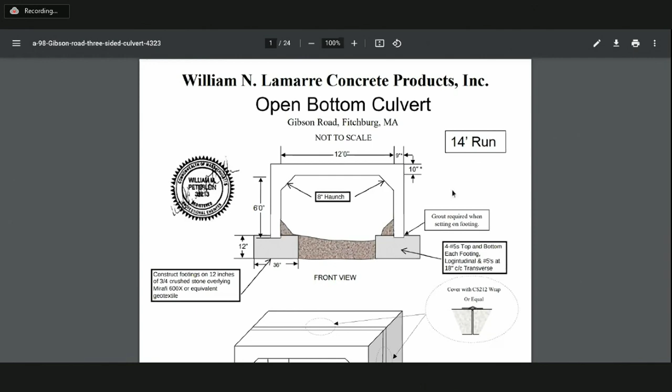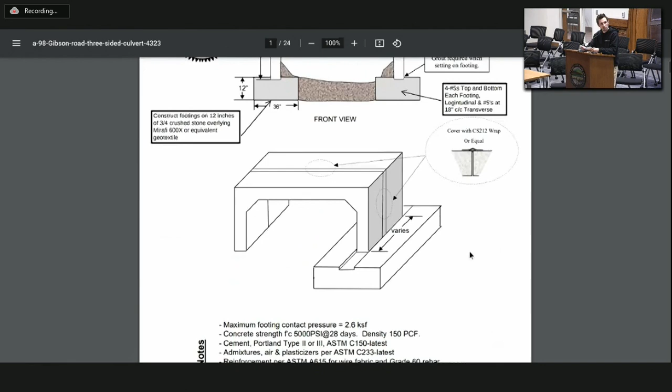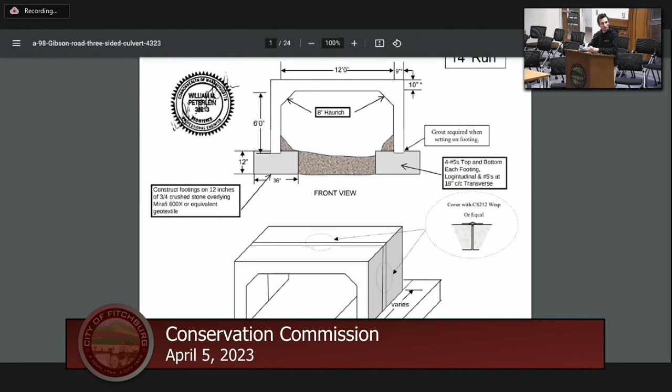Yeah, so this drawing is a little different because it was the best option that we had, and the clearance is going to be well past the stream, so it should not be an issue. Do we know what the distance is from footing to footing? Well, you got 12 feet here, so minus 1.5 feet on each side, so you got 9 feet.

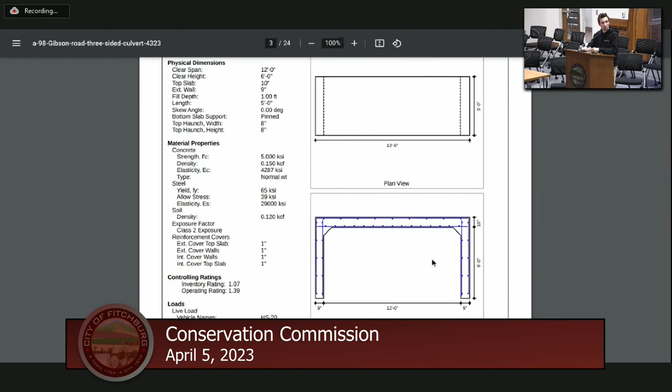Okay. The chair had asked at the beginning of the meeting about the stormwater standards. So with regard to the stormwater standards, Fitchburg is somewhat unique. The State Wetlands Protection Act gives basically a waiver to meeting the stormwater standards for a single-family home. However, the local Fitchburg Wetland Protection Ordinance does not give the waiver. So even if it's a single-family home, it does need to comply with the stormwater standards.

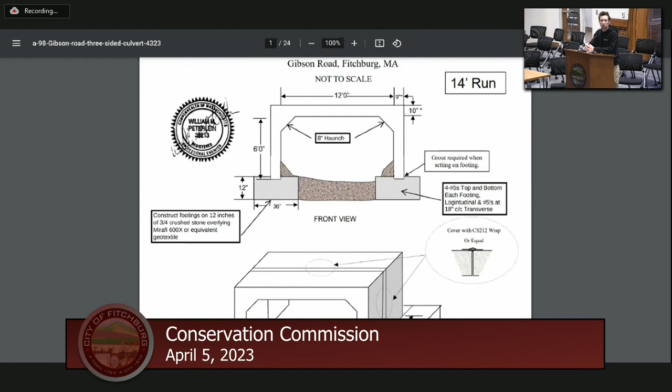Was there a submittal to show compliance with the stormwater standards? So last month we spoke about this, and my engineer had explained that this is the procedure in this situation, and it's been done multiple times. And, you know, based on the stream, I mean, it's 4 inches of water. It's not, in no way is it going to ever be 5 feet to the bottom of the bridge.

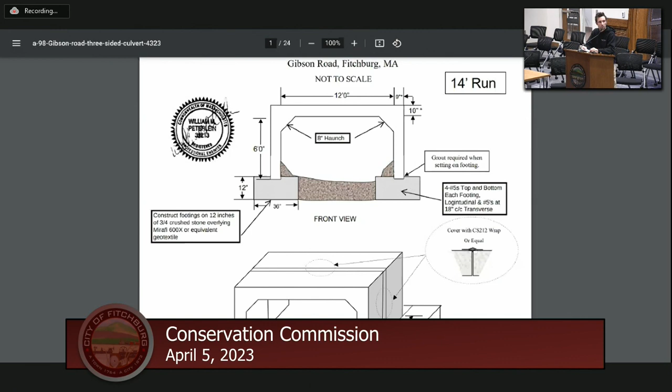Yeah, there's a little confusion. I think when we speak about the stormwater standards, we're talking about, for example, the amount of impervious area that's added to the site. And one of the standards is that the post-development rate of stormwater runoff must be equal to or less than the pre-development rate of stormwater runoff. So those are the standards that I'm referring to.

Well, in speaking with my engineer before this meeting, in his 45-minute monologue last month, I believe we covered all of this. As we both believed, this particular meeting, when we left off last month, the situation was to present the specs, which we have here. So I believe everything is covered in last month's meeting, which should be covered in the minutes. So I don't have anything to add to that because it's already been covered.

Well, it sounds like the answer is no. You haven't submitted documentation showing that the project is in compliance with the stormwater standards. That's what I'm hearing. Because it's been satisfied from last month, as we believe.

Mr. Smith, if I can interrupt here, in the letter from Mr. Popham, we have number 3, a stormwater report is not required by the state regulations, but you are required under the local regulations, the Fitchburg stormwater regulations. I mean, that is something that's fully documented. So if you want, Mr. Kurgowski, if you'd like to hold off on this until Mr. Popham is available, we're welcome to do that.

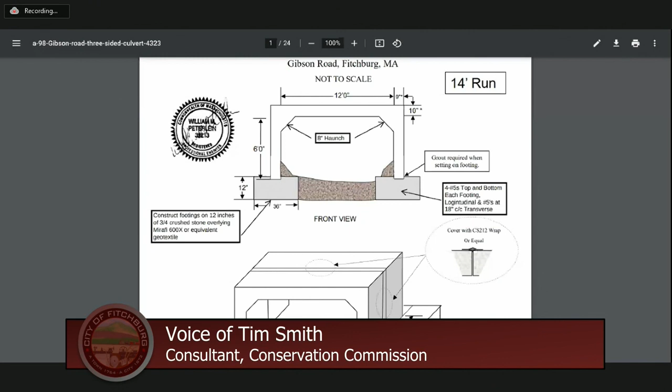Yeah, so part of the issue is this: the plans on the screen right now are the first time I've even seen these plans. I'm pleased to see that it has a PE stamp. I know that was a big issue raised at the last meeting. I'm pleased to see it.

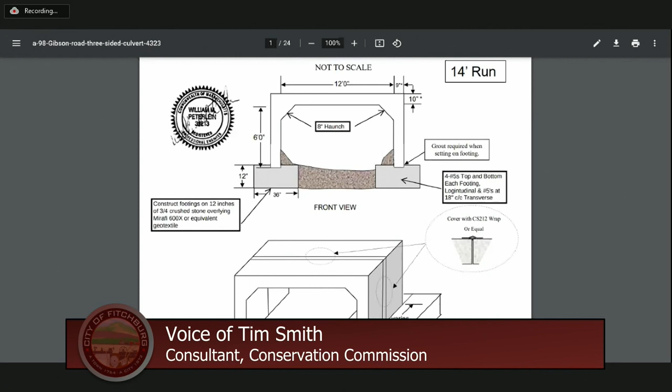It used to be that the height of the bridge was 5 feet 5 inches. The standard for large wildlife is 6 feet, so now it's compliant with the standard in the stream crossing standards for large wildlife crossing. And the footings, before they were stone, and now it looks like they're still stone, but the footings are definitely larger than they were.

So it looks like a number of improvements, and I would recommend that Nick Erickson review these drawings, so there might be further comments from Nick after he takes a look. But the only remaining issue I had was the stormwater standards.

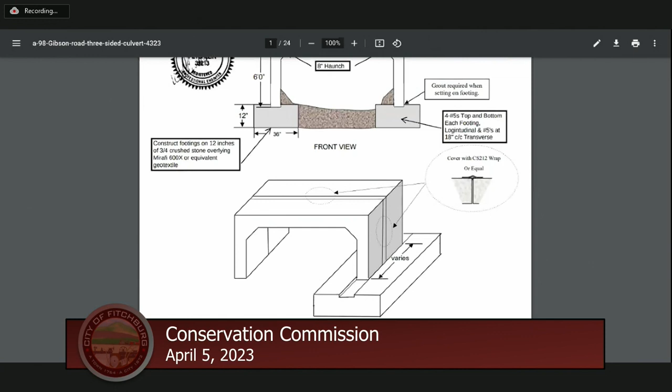Certainly. So you can refer to the local stormwater standards and the local wetlands bylaw to make sure you're compliant with those, because it looks like you were compliant with the state, but we also have our own bylaws here in Fitchburg. Okay.

So, Commissioner Donnelly, did you have a question? I did. Happy to see the culvert foundation. So there was a change in it. It shows a poured concrete footing.

Correct. And a little question I have is in one narrative, it said it would be at grade, and then the picture in front of us shows 12 inches below grade. And a little thing like that needs to be addressed, just explain, that's all.

Yeah, so this is how this particular company designs this. When Mr. Popham designed it, it was based on a different company, and this company is a lot more available, easier to get products. So I asked them if they could design it similarly, and they designed that with those footings. So that's the situation we're in. I think it's a better situation all around anyway, and I feel a lot more comfortable.

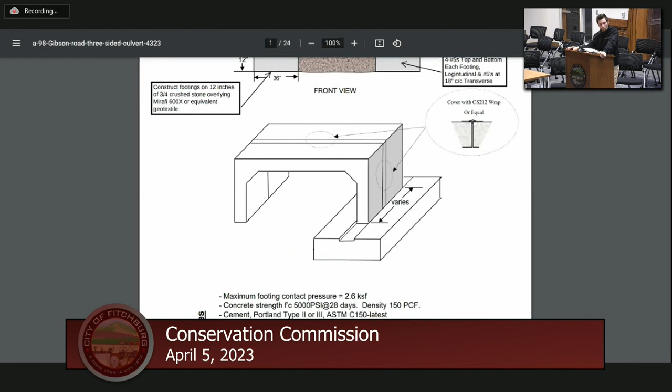I mean, either way, they're both rated the same as far as H20 for triaxle trucks, et cetera, but this is something that makes me as a builder feel more comfortable as far as traffic going over it. So I was happy to see that as well. It shows a depth of 12 inches.

Correct. So what? Well, I bet the Conservation Commission doesn't want to see you back in 5, 10, or 15 years to replace the bridge because of either heaving or settling. So the soil beneath it, I was of the impression that the soil might be saturated, and maybe it is, but it's gravel. I saw all of the test holes, all of the spoilings.

Far be it for me to tell you what element of compaction is necessary to support that bridge at 12 inches below grade from frost or settling. But that was a concern, because either one of those may have you back here, and what it does is just a further intrusion on the brook. That's all, and I want it to be.

Right. Thanks. Yeah, I would just remind the commission that we recently dealt with the bridge at Arbor Way, that because of disrepair, or because the bridge wasn't either constructed properly or designed properly, one of the two, the bridge is now in disrepair, and a significant amount of wetland is going to need to be filled because of that. So it makes sense to really review the design carefully, so we don't have a repeat of that problem we had on Arbor Way.

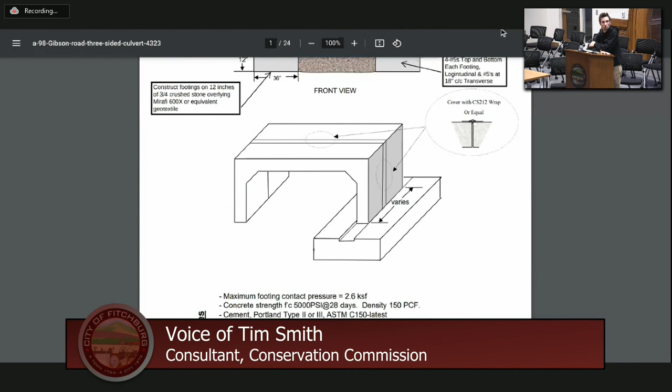Okay, so just as a response, this bridge is constructed for this specific reason, to go exactly as we're putting it. So we're going to be putting this bridge in exactly to specs as it was designed for. So I don't believe there'll be frost heaving, because it's exactly designed how we're installing it. Is that, you follow? I do.

It's about frost line. Okay. Above or below frost line, it's about saturated soils or hard and dry soils. I don't have the answer. I'm skeptical. Okay. And I'm sharing it with you.

You just heard, you should have heard that loud and clear, where we're going to lose a chunk of wetlands on a bridge only 20 years old, and it's huge. This is a drop in the bucket, but we don't want to go there. Right, no. And you don't want to go there. Exactly. Yeah.

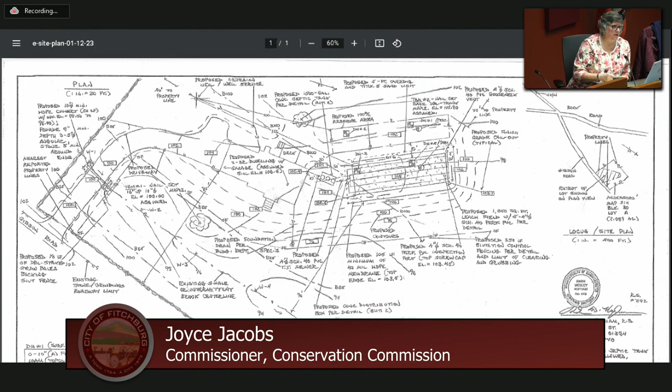Mr. Kukowski, is your intention now to add this new bridge design to a new set of plans for the entire lot, so we can see all the elevations as they're in place? That's not my intention at this time, because they're very minor changes. I don't think that would be necessary.

Aren't you going to have to do something? I would expect the building department is probably going to require you to have the plans. We want to be able to reference this as what we're conditioning on, a set of plans, and this is what it entails.

The set of plans submitted, that are on the screen right now, do not include the bridge. This is with the culvert. There are some additions. We've now determined that it's an intermittent stream rather than a swale. So the suggestion would be to have the plans updated, because you're going to need that anyway.

They've been updated. They should be in the system. We did it two months ago. This is the latest plan that we have. Well, I have a plan here with a bridge on it that I submitted two months ago.

So there are two sets of plans, one with the culvert, and there should be another one that we had on the screen two months ago with the bridge, not the one being proposed right now. That was the bridge that Mr. Popham presented at last month's meeting, in a different fashion.

So then my other question, leading up to that, is your intent to bring in fill on either side of the bridge? Correct. Okay, how are you going to stabilize that fill to keep it out of the wetland, not out of the stream? Are you planning on riprap? Is there anything going on to stabilize that fill?

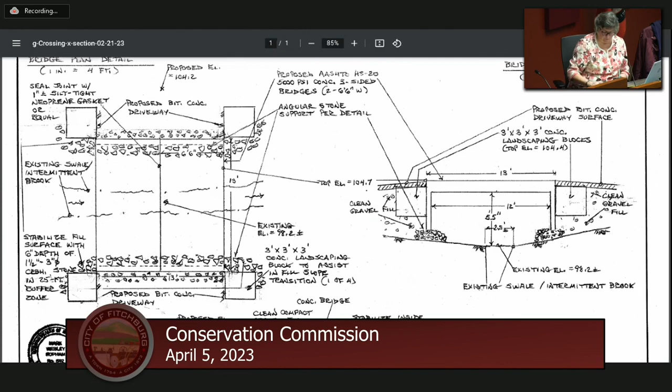So the plan, I would think, needs to be updated, if everyone else agrees that the new bridge you presented tonight should be reflected in the entire site plan. And as far as the second site plan, the dimensions are all the same, so

can we see if that's being updated? Because on here, it's a three-sided bridge, 6'6" by 13-foot long, so that's basically what we have here. I'm talking about the other plan, similar to what we had up there, but the one that was submitted secondarily.

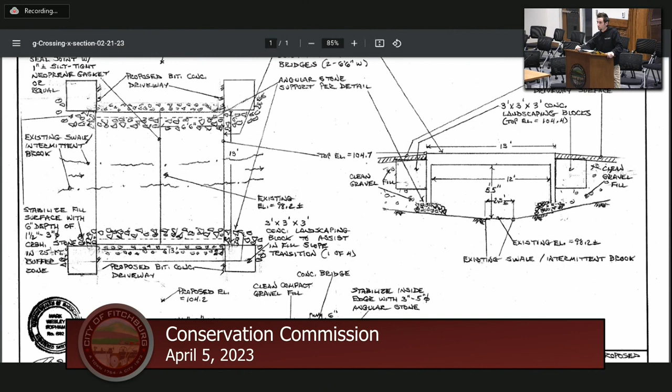All right, I'm not sure which, Commissioner. Donnelly? Yeah, if we could use some dates — the plan that you have in front of you is dated November 4, 2022? November 4, 2022? For the whole site plan, Mike? Yes. Okay, page 1.

And then page 2 had the old bridge. You passed in an addendum, open bottom culvert, Lamar Concrete Products. Correct, as an addition. I believe what the commission is asking is: page 1, dated November 4, 2022, showed a culvert, and didn't even show the other bridge we've since pushed aside.

I guess we're looking for a plan that shows the new open bottom culvert bridge in some specific detail — the detail of the bridge exists, you gave that to us, but on a comprehensive plan beyond November 4, 2022, similar to this one, correct? Okay, right, with the new bridge incorporated into that. And are there elevations there?

Yes, that's part of the problem - we can see the new bridge with elevation. So is it that we just don't have that plan? It's been submitted to the system. It was a month after this, or two months, at the second meeting, we had looked at it. So this is the first plan that's been submitted into the system. I can't delete them from the system, otherwise I would have, so we could avoid this confusion.

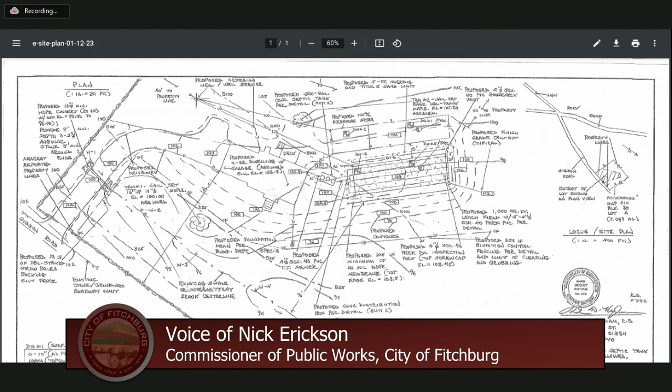Thank you, Tracy. Can you hear me? Yes. Okay, so I just received the updated culvert detail earlier this week, so I haven't had a chance to fully go through it. That culvert detail appears to show very well the structural design of the culvert, the opening size, the size of the footings, and some calculations supporting the H20 loading for that size.

What it doesn't reflect is how that culvert is being integrated into the overall site. I believe the request by the commissioners previous to me coming on is valid - we need to see exactly how that culvert is being integrated into the site. There's been previous cross-sections and details shown for the previous culvert design that doesn't include the footings and a few other things. So I think what's being asked is that these plans be updated to show how that latest culvert detail is being incorporated into the overall site.

On the back side of the culvert, what level is the fill being brought up to? How deep is the cover over those footings? What's being done around the footings down into the channel for riprap? So those details that were reflected on the previous plans just need to be updated with the most recent detail that's been provided. In addition, I know a professional engineer has stamped that culvert detail, but they have not stamped the overall site plan.

The plan that we have right now shows a registered sanitarian stamp, which is valid for the septic system design, but for the rest of that site - the bridge design, culvert design - that's not a valid stamp. So the overall site plan needs to be updated to incorporate the latest culvert design, and the whole thing needs to be stamped by a PE.

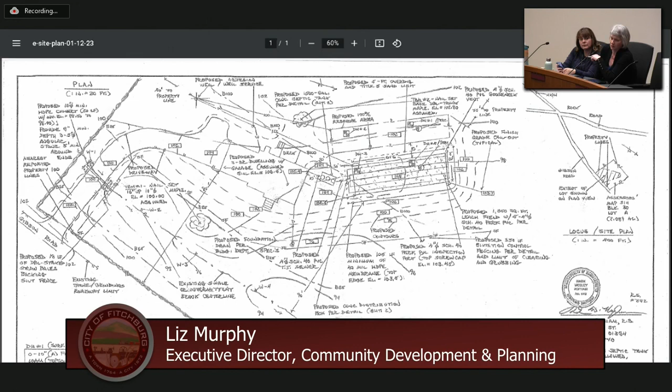That's the latest one we have. This site plan is the only one I have that's in our documentation, and it's dated 1/12/23. The comprehensive site plan has not been updated since this point.

Then if you have it all done, submit it. If you have the box culvert indicated and it matches the culvert you're submitting tonight, the bridge, then submit it for our review. I'll submit it again, I guess. Thank you, Mr. Kurgowski.

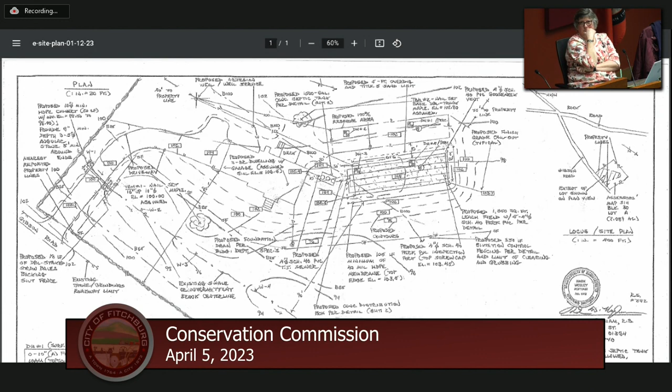So just to start, we need some documentation that is compliant with the local stormwater standards and the local wetlands bylaw, and the updated plans. Mr. Erickson needs to see a stamp on those updated plans by a professional engineer, a structural engineer I think. He was clear he needs to see the application of the culvert in the plan. I'll submit it again, and it needs to go to Mass DEP. The plan and the crossing have to be approved by Mass DEP.

It's been sent, I'll just check. They have nothing as of last week, and I spoke to them last week. There's no new plan from the notice of intent. Okay, I'll figure it out.

That's good. Okay, so can we have a motion and a second to continue this? Motion to continue. Second.

Let's call the roll. Commissioner Baker, aye. Commissioner Christian, aye. Commissioner Donnelly, aye. Commissioner Helene, aye. Commissioner Jacobs, aye. The chair is in agreement, so we'll continue this to next month. And Mr. Kurgowski, please work with the Office of Community Development. Will do. Thank you.

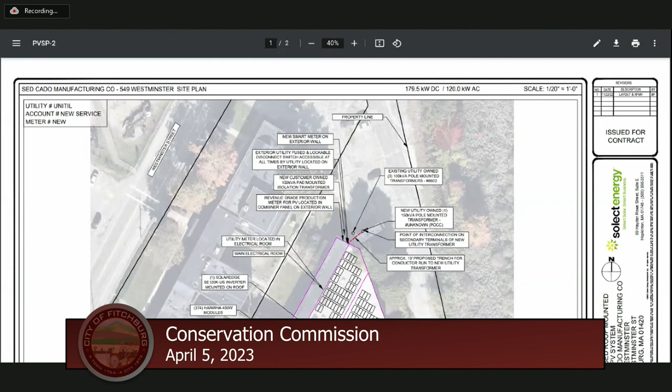Okay, he's available. Good evening, can you hear me? Yes. Thank you. My name is Steve Gregory, I'm with Select Energy Development out of Hopkinton, Mass. We were before you last month with two requests for determination of applicability for 549 Westminster and 555 Westminster, the Sed Cado properties. I had originally worked with Michael O'Hara before he left Fitchburg, because there are two short underground trenches from our proposed rooftop solar at both addresses to an overhead utility pole. And because it falls within the riverfront management area, Michael believed that an RDA was in order.

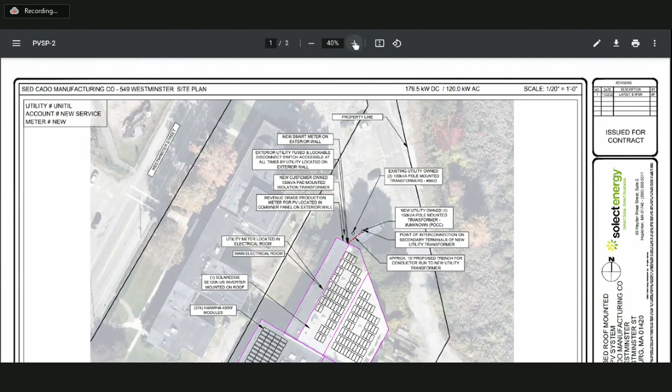And then at last month's meeting, the commission requested a letter from the environmental consultant that oversaw the cleanup when the property was owned by Weyerhaeuser several years ago, which we did submit a few weeks ago. And I believe that addresses the concerns the commission had. The proposed trenching is not within the previous mitigation area.

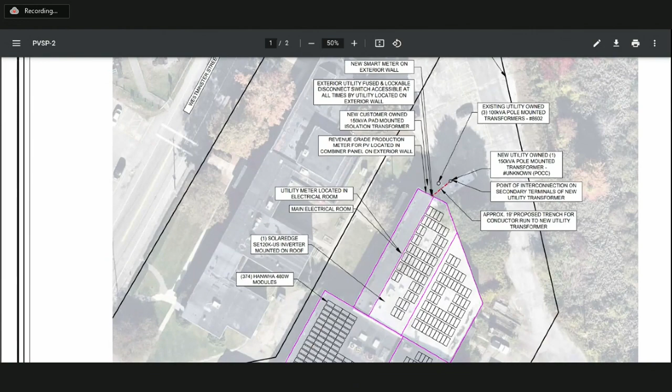Okay, thank you Mr. Gregory. Let's open the floor for public comment. Would anyone like to speak in favor of or against this hearing, or would you like to request more information? We don't have anyone in person here. Do we have anyone on remote who would like to speak? I don't see anyone at this time.

Hearing none from the public, thank you Commissioner Jacobs, let's turn to the commission. Do we have any questions from the commissioners in person or remote? Yes. Dr. Baker?

Thank you. I was the person that suggested that we needed to check to make sure that there weren't going to be any contaminated soils in these trenches. Having read the letter from Martin Lebo, I'm satisfied that the applicant has addressed that, and I think there's not a concern there. Thank you, Dr. Baker.

I visited the site today. I'd like to make a motion of negative determination. Okay, do we have a second? Second. All right, Commissioner Baker, aye.

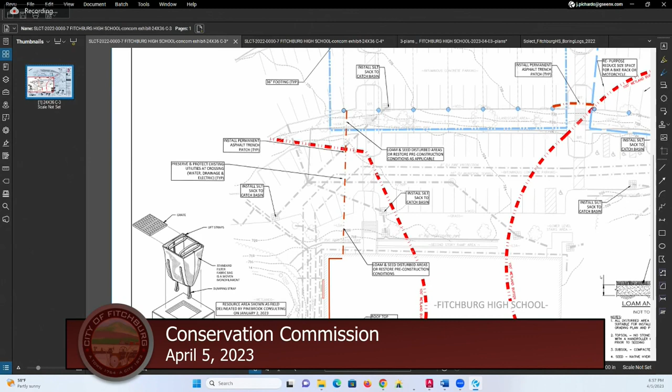Members of the board, can you see my screen? Okay, so basically what we're going to be doing is the installation of 3 solar canopies on 2 distinct project areas already constructed within the buffer zones, with no additional impact to the existing regulated areas. This screen shows project area number 1, and the red line represents the 100-foot buffer from the B series of wetlands. The only portion of the solar canopy will be 5 footings and a very small portion of the overhead. On the opposite side, this red line also represents a 100-foot buffer from the vegetated wetland, and the solar canopy is entirely outside. However, the electrical trench going to the building will cross the buffer, but again within already developed area, not creating any additional impacts.

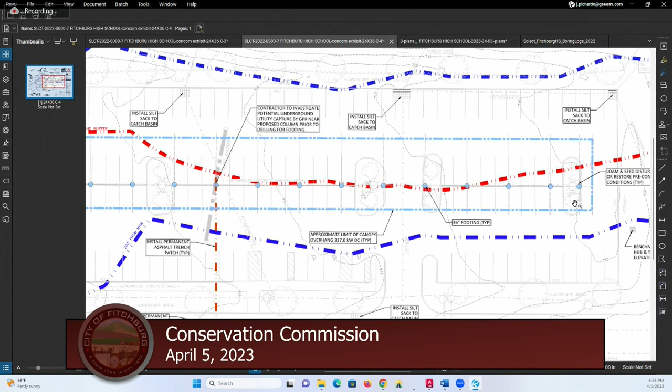Project area number 2: the solar canopy will be installed at the center of the existing parking lot, similar to the other one. However, here we have a riverfront from an unnamed stream. This blue line represents the 100-foot from the mean high water, and the second blue line represents the 200-foot from the riverfront. The red line is the 100 feet from the BVW on that side. Again, the only work within the parking lot will be installation of the footings, which will be 3 feet diameter by 10 foot deep in both cases. Both projects will not create any additional impact to the pre-existing buffers. If the board has any questions, I'll be happy to answer.

Thank you, Mr. Pichardo. Do we have anyone from the public in person who would like to speak? I see none. Let the record also show that Commissioner Helene has recused themselves. Do we have anyone in remote attendance who would like to speak? I'm seeing a no from Commissioner Jacobs. Hearing none from the public, let's turn to the commission.

Do we have any questions for Mr. Pichardo? Commissioner Donnelly: a couple of comments. The City of Fitchburg recently hired an architect to design a school in the image and interests of the residents of the city. That architect laid out the landscape, the height of the building, the width, the roof slope, the exterior facade — all of it absent a solar array. We paid for their expertise, and this is in stark contrast to what they sold us. Are we sure that's where we want to go?

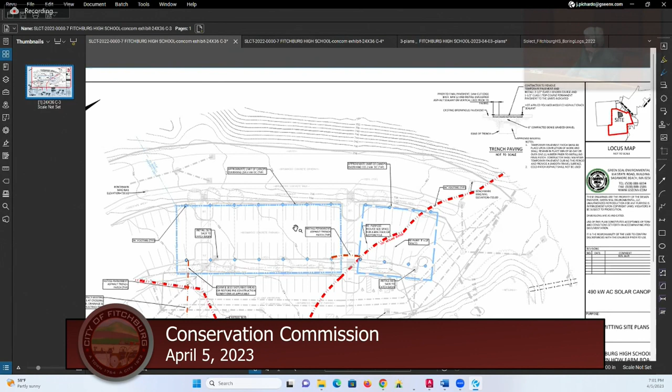Mr. Pichardo responded that all plantings removed from the islands will be relocated on site, with the school weighing in to determine the most strategic place to relocate them. Could we have a plan that reflects that relocation? Yes — and additionally, this project will not go to the building department for construction yet; it needs a special permit and site plan review with the planning board, coming next. At that time, your agent will be able to see those plans and compare them with whatever determination you made tonight. Thank you.

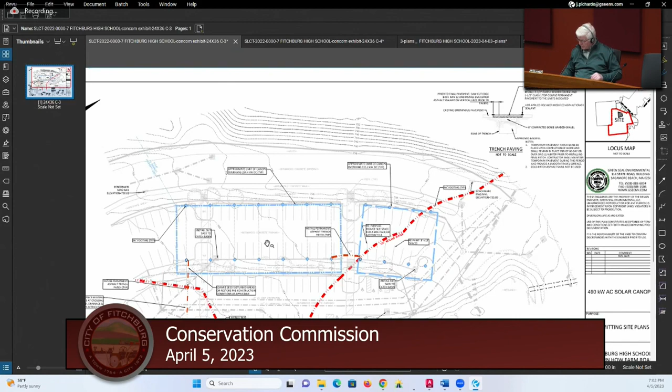Yeah, Mr. Smith, Mr. Erickson, are there any comments or questions you have? Nick has his hand up. Mr. Erickson?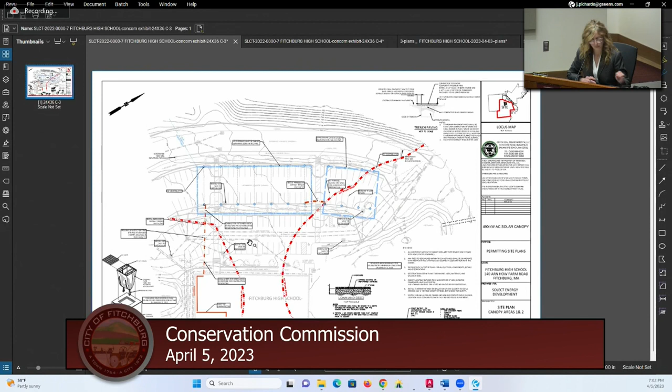Thank you very much. I don't have any particular questions on the plan. I think they've provided some erosion control details for the trenching work, and overall the canopy seems to be over existing impervious area, so I don't think it's going to change the runoff characteristics of the site. But I need to look at the plans a little bit more closely, and I'll definitely be doing that during the site plan review phase of the project as well. But as far as what's being presented tonight, it looks like they've done a good job of summarizing everything in this plan set.

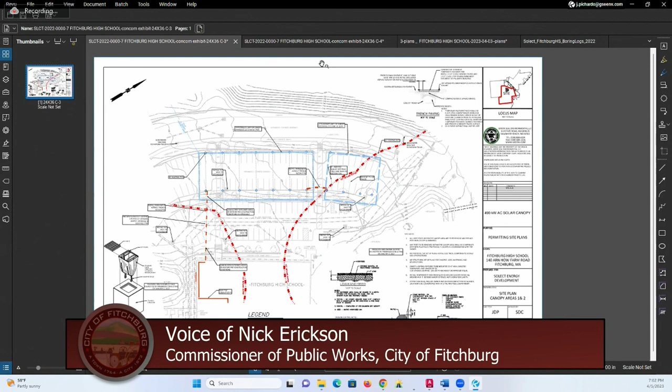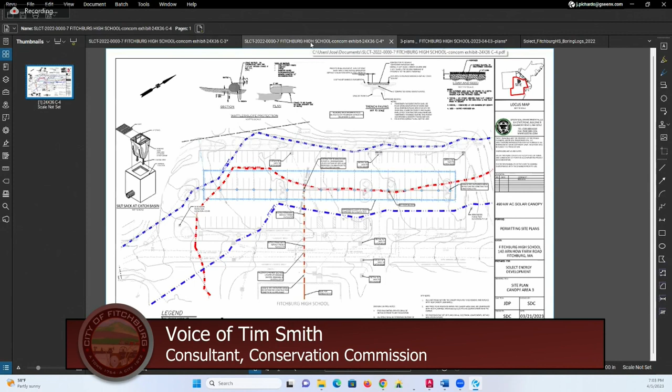Thank you, Mr. Erickson. Mr. Smith? Yeah, so the applicant talked about the plantings in the landscaped islands. What about outside the parking lot? Will there be any trees that need to be taken down because they'll be in shade, or they'll cause shade to the solar array? No, there would not be any tree removal outside of the parking area. So the scope of the entire project will be within the already disturbed area, not anything additional.

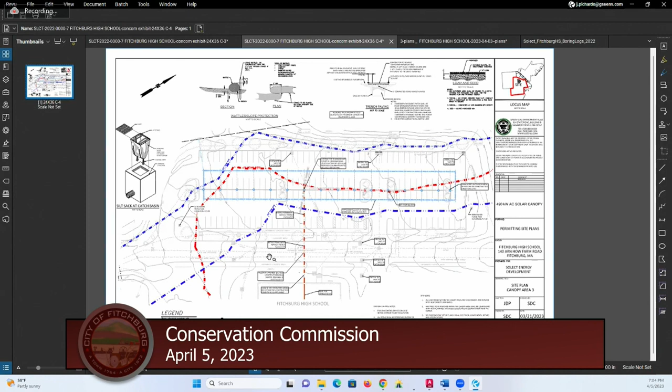Okay, so how will the solar panels drain? I know I've heard where this was done in another location that it became very problematic because the solar arrays would get snow on top, it would melt, it would cause ice to form, icicles, and the icicles would fall down on the cars and damage the cars.

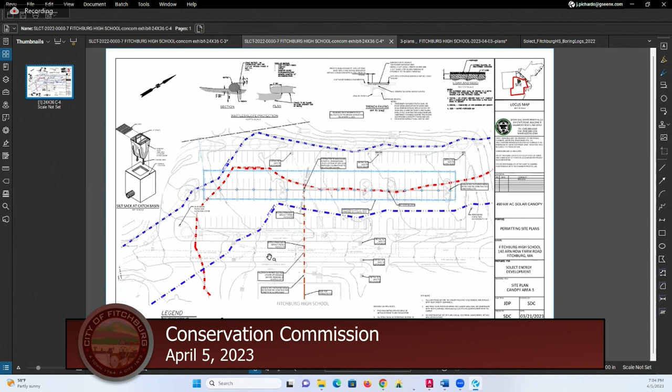Where's the water going to go when it goes on the solar panels? Is there space in between the panels, or does the water just run all to the rear of the parking lot? And if so, are the panels over the parking lot, so the drainage from the solar arrays drains onto the parking lot and then goes into the drainage system? Or conversely, does the water flow off the panels and into the grassy area around the parking lot? So basically, the canopy and the solar array does not modify any portions of the watershed.

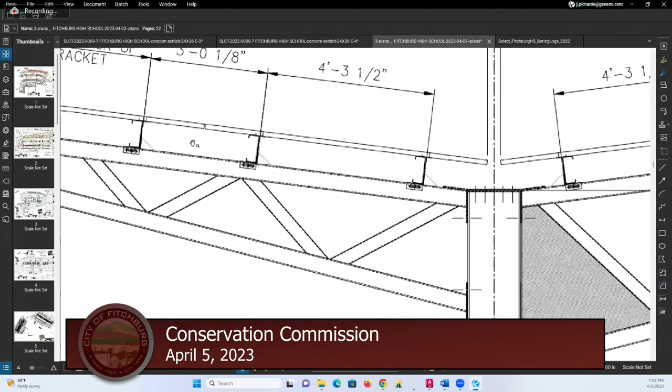Yes, the panels will have a gap in between, about a 1-inch gap all around. Each panel is basically under 35 square feet, so it's not enough to concentrate any runoff. It will go through the gaps and direct to the ground, following the existing topography of the parking lot. There's a gap over here, you can see that in between, and that's all around each panel. It's similar to the analogy of trees with canopies and leaves - water hits the leaves and continues its way. It's very similar to that.

Jose, is there another installation that exists that you can point to that's similar to what's proposed, so that the commission could look at? Is this the first of this type and design, or are there others around? No, we've done many. I can name one, the Fuller Middle School in Framingham, that was permitted and constructed.

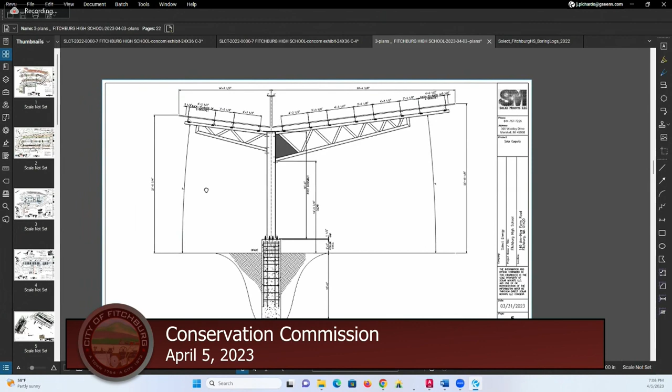Okay, do we want to continue this until the site plan review happens with this, Mr. Erickson? Or do we want to make a determination of applicability? I would be prepared to make a motion to request a negative determination, pending Commissioner Erickson's advisory. Okay, do we have a second? Yeah. So, motion for a negative determination on this applicant. Second.

Commissioner Donnelly? The planning board has yet to weigh in. Do you want us to wait? So we have a motion on the table. That's fine, that was just a comment, nothing more. Okay.

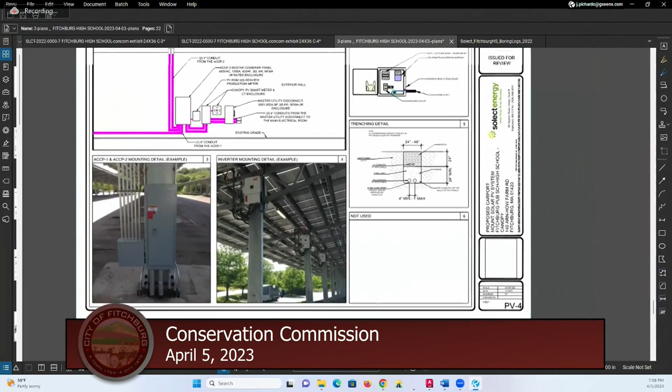Do you have any pictures of a finished project? I don't have an exact picture, but I can show you something that looks similar to what it's going to be. You folks probably know that there's a large series of similar arrays over the parking lot at Heywood Hospital in Gardner. Yes. And the new Mass DOT District 3 building in Worcester. This one actually is on Stone Zoo. Supposed to be on Stone Zoo.

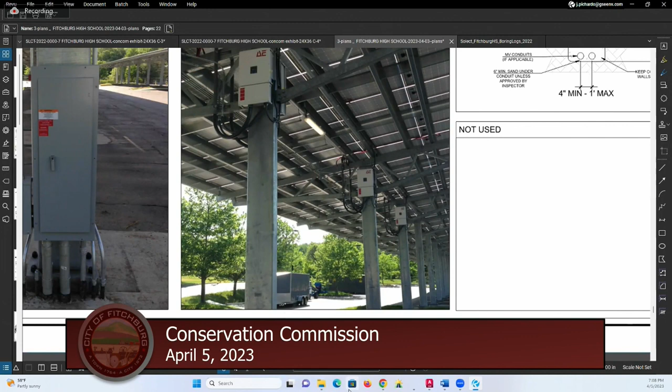Okay, we have a motion on the table, and there was a second. Okay, so let's call the roll for a negative determination of applicability pending the site plan review. Commissioner Baker? Aye. Commissioner Donnelly? Pending the site plan review, aye. Commissioner Jacobs? Aye. Commissioner Serfield votes in favor. So we're pending the site plan review. Thank you very much, thank you all.

We appreciate the time. We can sign this next month. Pending the site plan review, so you want to hold off on this? Yeah, I think we can get it ready and then it'll be ready to sign. Okay, yeah, I mean, that's what we're doing now. Okay, thank you, Mr. Pichardo.

Thank you, Mr. Pichardo. Thank you all.

Moving forward, under other business, violations and enforcement orders, 170 Arnhow Farm Road. Joyce, would you like to speak to that?

I think you probably have more to add than I do at this point. Just to update everyone, we did send out a notice to the new property owners that there was a violation on their property and asked them to attend the meeting tonight to discuss that. The Chairwoman did speak to them because the property owner did come. Yes, the property owners did come to the meeting and requested an interpreter, which we were not able to plan for. So we will plan to, Liz has got their information so we can communicate with them to have an interpreter available for our next meeting and also for a site visit.